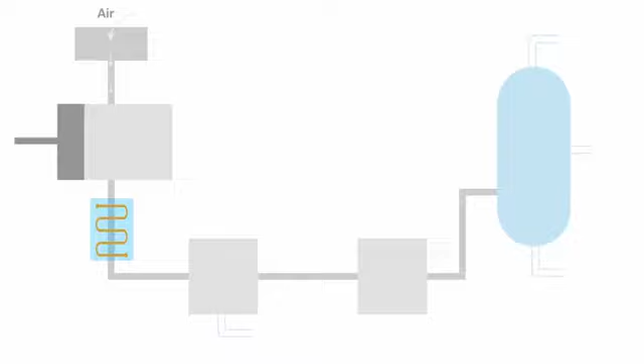In this video, we will learn how oxygen is made artificially, how it is stored and how it is transported. The whole process is like this. At first, air is sucked inside a compressor. There's a filter before that, so that there are no impurities like dust particles.

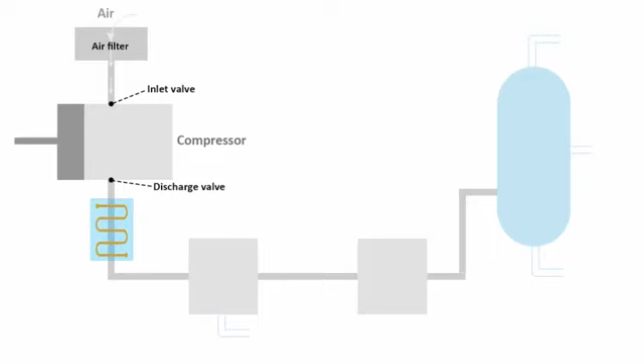If you look inside a compressor, there are two valves. The inlet valve sucks air in, and then with the help of a piston, the air is compressed to a very high pressure. The compressed air is then released through the discharge valve. One thing that you have to understand is that when air is compressed, it heats up.

Because when you pressurize a gas by compressing it into a container, you're putting all those molecules into a smaller volume of space, and you are adding potential energy by the compression. Then when you release that gas back to atmospheric pressure, that energy has to go somewhere. So it's given off in the form of heat. That means the air that is released through the discharge valve is warm air.

Now this warm compressed air needs to be cooled. For that, it is passed through a freezing unit. And that is done with the help of liquid nitrogen. Liquid nitrogen is very cold. It can freeze anything instantly. Here you have to understand that liquid nitrogen is not mixed with the compressed air.

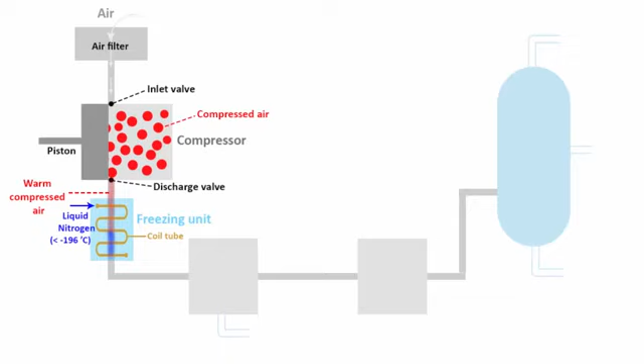Rather, the discharge pipe through which the compressed air flows out is covered with coil tubing. Liquid nitrogen is pumped into that coil tube, which is in direct touch with the discharge valve, through which compressed air is flowing out. After coming in touch with liquid nitrogen, the compressed air becomes cold. The temperature falls down up to -200 degrees Celsius.

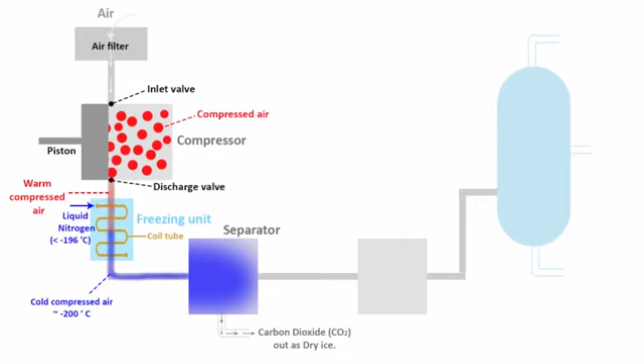The cold compressed air is then sent to a separator. Here carbon dioxide is separated as dry ice. The air that is now free from carbon dioxide is sent through an expansion turbine, where the air is allowed to expand. Here the air turns into liquid. It is called liquefied air. Its temperature is around -200 degrees Celsius.

In the end, liquid air is sent into an air distillation column, where it is slowly warmed up, because it then separates various components of air like nitrogen, argon, oxygen, etc. As you may know, air is a mixture of different gases. So in this air distillation column, different gases that are present in the air are separated by slowly warming up the liquefied air.

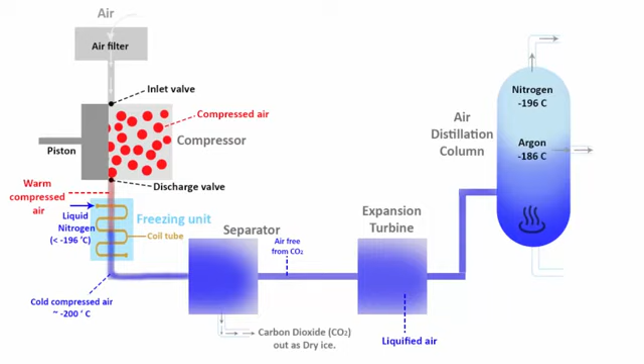Nitrogen gets separated first, because nitrogen boils around -196 degrees Celsius. After that, argon gets separated, because argon boils at -186 degrees Celsius. Oxygen, which has a higher boiling point, is left behind and is collected separately. Now please don't get confused, because -196 is much cooler than -186.

Oxygen boils around -182 to -185. So if you look at these three temperatures, obviously -185 is higher compared to the other two. That means oxygen has a higher boiling point. At the bottom of the air distillation column, you will see liquid oxygen settles down.

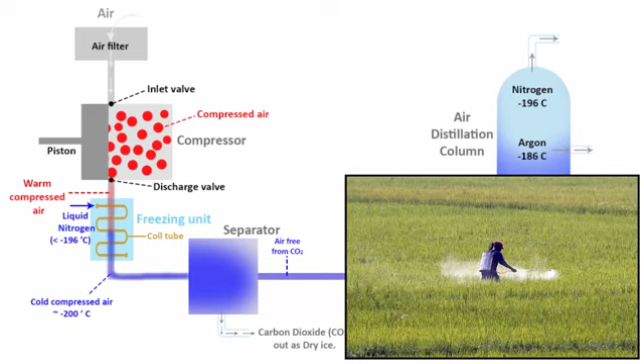Argon gas is sold for industrial use, particularly in the iron and steel industry, for welding and casting. Nitrogen gas is used to make fertilizers and in food packaging industries. So basically from this entire process, in the end you will get liquid oxygen. Liquid oxygen is then transported by filling it into special containers such as aluminum cylinders. If it is required in larger quantities, then cryogenic containers are used.

So always remember, oxygen for industrial use is delivered to customers in liquid form, and it is stored in cylinders and tanks at high pressure. It is said that the pressure at which liquid oxygen is stored in a container is up to 3000 psi or 200 bar. For those of you who don't know what 3000 psi is, psi is a unit of pressure expressed in pounds of force per square inch of area.

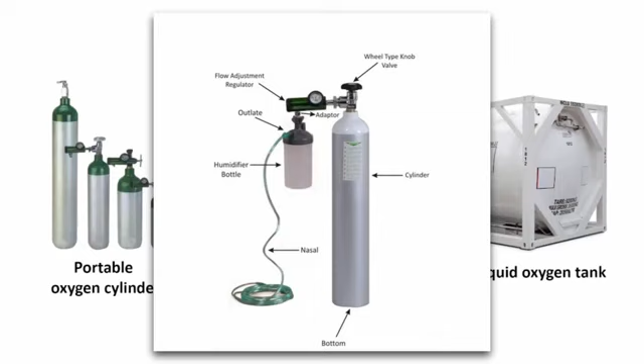In layman's terms, anything more than 1000 psi is a lot of pressure. When you give your car for cleaning, you will notice they clean your car with a high pressure water spray gun. With that much pressure, you can easily clean all the dirt from your car. Anyhow, liquid oxygen is stored in the cylinders at around 3000 psi. These cylinders come with a pressure regulator that allows you to set the output pressure. A patient in hospital needs around 50 psi, which allows low supply of oxygen.

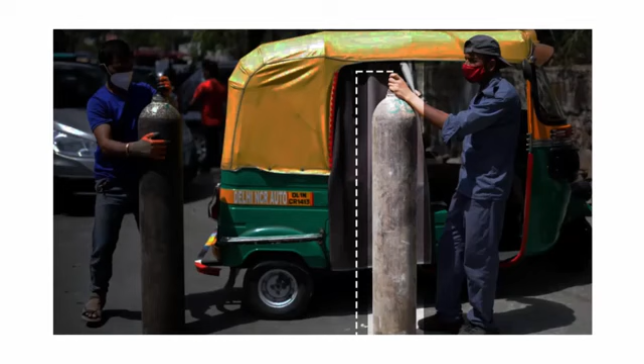Oxygen cylinders come in different sizes and can be pretty heavy. The largest size is around 1.5 meters tall and contains over 7,800 liters of liquid oxygen. Today, a patient in a hospital can require up to 130 liters of oxygen per minute. That means a large cylinder would last about an hour.

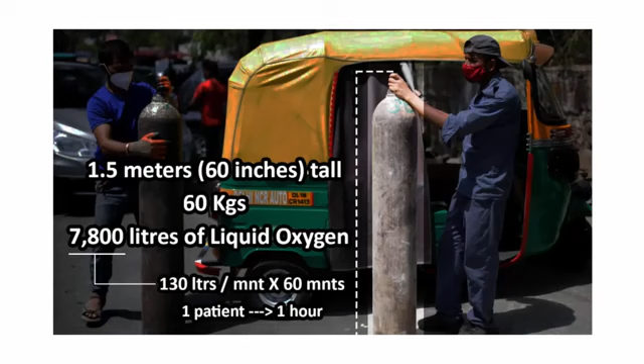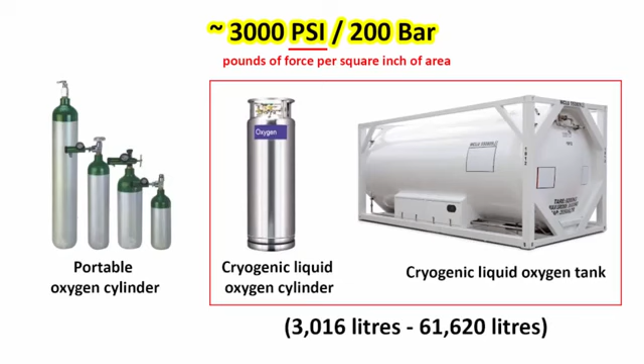Now, a cryogenic oxygen tank looks like this. They come in different capacities from 3016 liters to 61,620 liters. The Indian Air Force has airlifted 4 cryogenic oxygen tanks from Singapore in a C-17 aircraft. Apart from Singapore, India is also looking at lifting oxygen tankers from UAE.

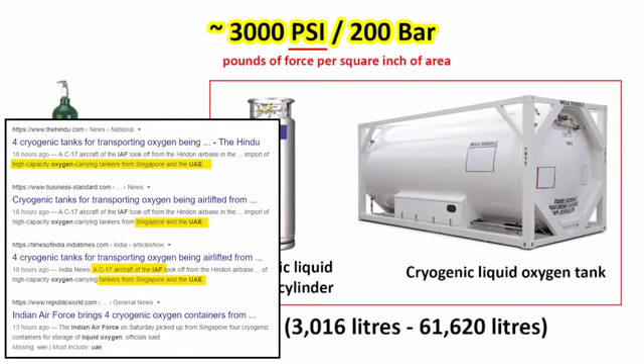The reason these tanks are called cryogenic tanks is because the term cryogenic is used for anything that is produced or stored below the temperature of -150 degrees Celsius to absolute zero. Absolute zero is referred to as minus 270 degrees Celsius. The reason it is called absolute zero is because no object in this world can be cooled below minus 270 degrees Celsius, because it is believed that there is no heat energy left in a substance below this temperature. As per the laws of thermodynamics, absolute zero cannot be reached.

Anyhow, the meaning of the word cryogenic is anything that is produced or stored below the temperature of minus 150. Since liquid oxygen is formed at minus 185 to minus 182, that is why these large oxygen tanks are named cryogenic oxygen tanks. I hope you found this video informative, and I'll see you in the next one.